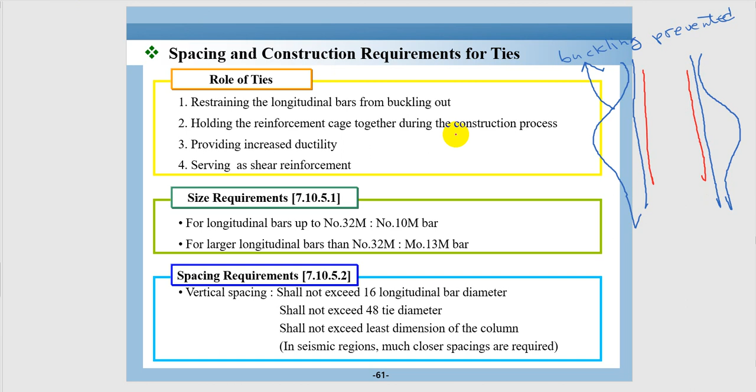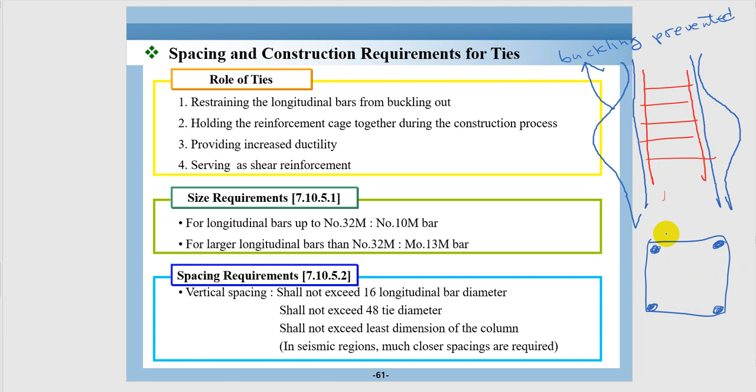So this is a column, and inside of the column we have vertical rebars, the longitudinal rebars, and the rebar in the column is vertical. The buckling is prevented when you have proper hoops, something like this. If you see it from the top, this will be something like this. This is the hoop, or the ties for columns, and we have vertical rebars, longitudinal rebars, and this will provide a confining effect here, so that we can prevent buckling.

So the second role is holding the reinforcement cage together during the construction process, so that we can install the vertical rebars and hoops together, placed in correct positions, making construction very easy and fast. All these vertical rebars and hoops are tied together and installed before we pour the concrete.

So it's holding the whole cage and also providing increased ductility. The ductility is increased when buckling is prevented, and it serves as shear reinforcement. This is also one of the very important reasons. These hoops can provide shear reinforcement. It looks like a stirrup in beams, as we saw before.

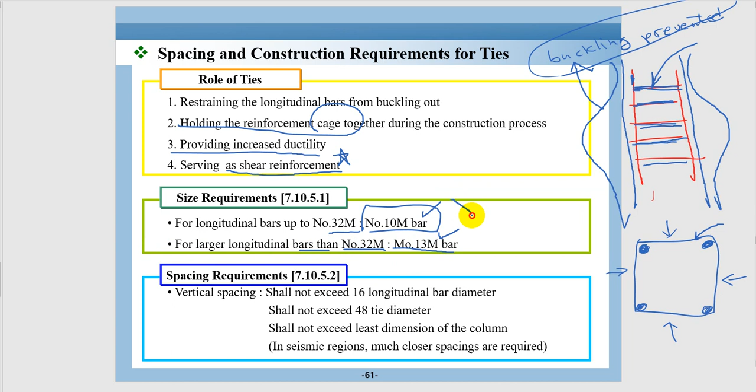Size requirements: ACI 7.10.5.1 specifies that for longitudinal bars up to 32 millimeter, we need at least 10 millimeter tie bars. However, the tie bar increases to 13 millimeter when we have longitudinal bars larger than 32 millimeter. These are important, so the tie bar size is either 10 or 13. Some countries use a 12 millimeter bar, but we don't have a 12 millimeter bar in Korea.

Spacing requirements are shown in 7.10.5.2. Vertical spacing shall not exceed 16 longitudinal bar diameters, that is, 16 times the vertical bar. If the vertical bar is 20 millimeter, 20 times 16 is 320 millimeter. So you can't have wider than 320 millimeter vertical spacing. This vertical spacing cannot exceed 320 millimeter if your longitudinal rebar size is 20 millimeter, by the first requirement. Do you follow me?

It also shall not exceed 48 tie diameters. If your tie is 10 millimeter diameter, multiply by 48, so 480. You can't exceed 480 millimeter for vertical spacing. And the last one: it shall not exceed the least dimension of the column. If the dimension of the column is, let's say, 500 millimeter, then you cannot exceed 500 millimeter as vertical spacing. So the dimensions of the column also limit the vertical spacing.

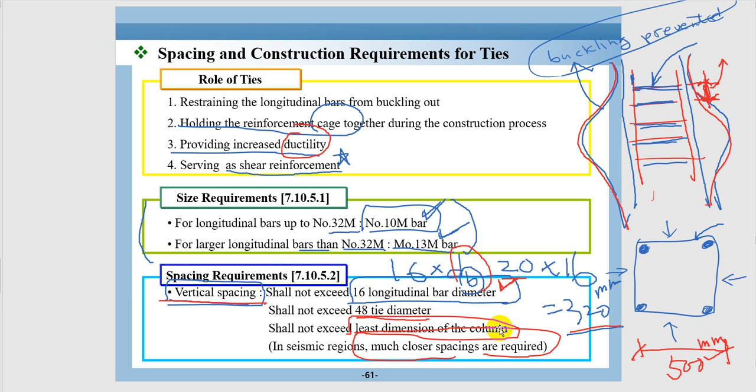The last one is also very important, 7.10.5.3. These are long sentences, and it's difficult to understand before you listen to me. After you listen to me, you will probably understand them. This is simple, very simple.

What this section tries to say is, first, the clear distance between the bars cannot exceed 6 inches, or 150 millimeter; some say 15 tie bar diameters. But the code says only 150 millimeter or 6 inches. You could still remember that this can be farther than 15 db, which is 15 times the tie bar diameter. So the clear spacing of vertical bars should be equal to or less than this.

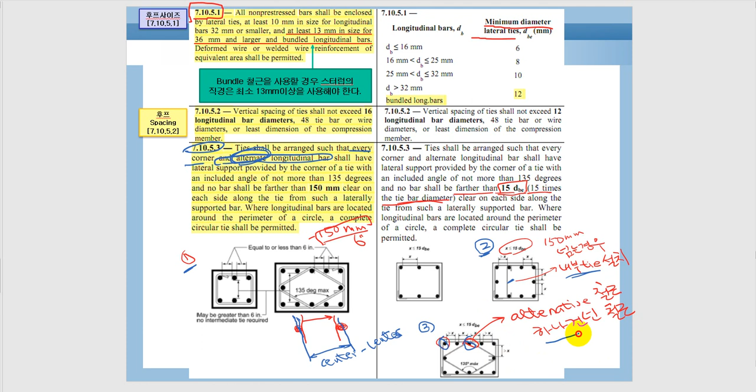Here the code says every corner bar and alternate longitudinal bar, right? This is a difficult term, isn't it? Alternate. Alternate means every other one, right? So this is the corner bar and this is the alternate bar. So alternate bars shall have lateral support. Lateral support is like a hoop that we are discussing right now.

So code English is sometimes very condensed, written in a short way. So sometimes it's difficult to understand, so you have to listen to me very carefully. If you have corner bars and alternate bars, I'm gonna erase it. Alternate longitudinal bars shall have lateral support, a hoop provided by the corner of a tie with an included angle not more than 135 degrees. This is very important. This is number 3. And these were number 1, if you remember.

Alright. So if you have corner bars and alternate longitudinal bars, then you need to provide a hoop here, one hoop here. Let me draw it again. You have one hoop right here for the corner, and then you have another hoop for the alternate bars by providing this. When you do this, your angle cannot exceed 135. This is what this section tries to emphasize: the tie with an included angle of not more than 135 degrees.

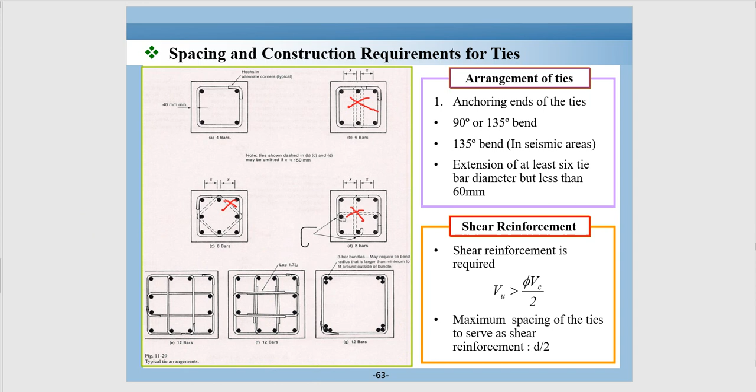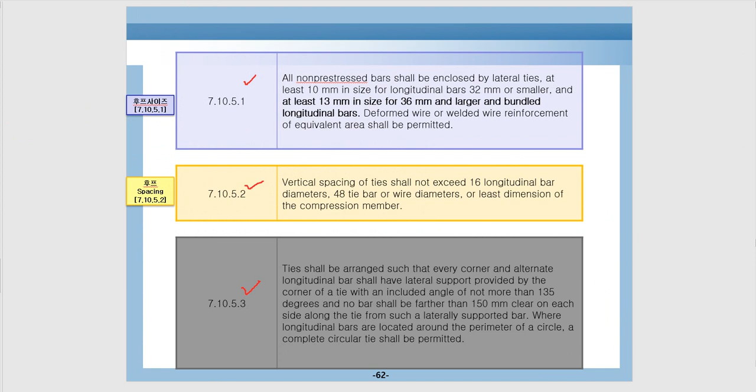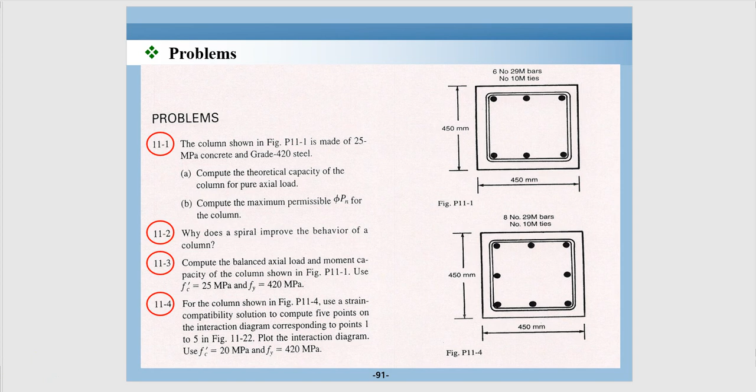All right, so I think I explained everything you need to know for designing column longitudinal bars and tie bars as required by these 3 ACI sections. I gave you these problems for self-study here and here. You don't have to submit them, but those who want to submit, please go ahead and I'll grade it for you. But this is not required for this class, as I said.